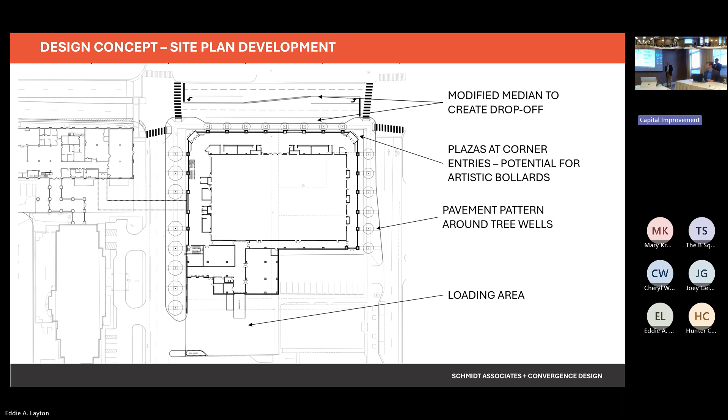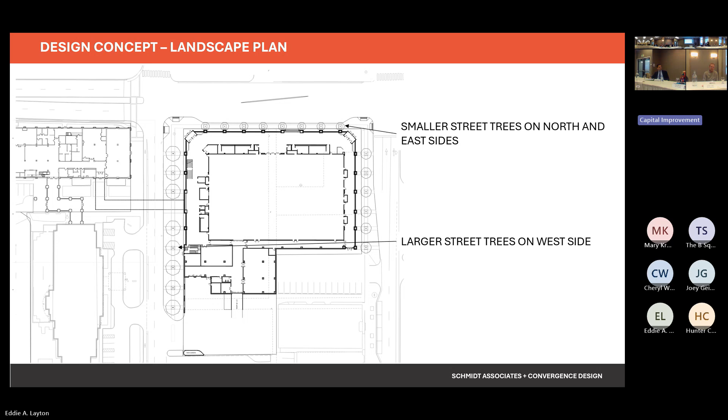Sure. I have another question, and this is just concerning utilities. Seeing that we have some underground storage along the trees along College, we were doing some things there with storm water filtering, right? Yes. And I know right now the utilities run right down the alley in the middle of the building. We have that in the budget, I assume that we've worked through this point for the utility location, right? I just want to make sure that box is checked because that's an expensive part of relocating any utility, and of course the cost is borne by the client. So I want to make sure we've accounted for that in our budget before Eric here, Mr. Spoonmore, wants to make sure it's in the budget as well, Mr. Treasurer.

Yes, we've talked with each of the utilities. Definitely, we have estimates for all the work, and they're working with Jeff Underwood, they're all addressed properly.

So are we at the stage yet where this is being discussed with city planning? Has a planner been assigned to the project? From the beginning, when we were conceptually discussing the project, we met with Jeff Scanlon, and then we've met with him several times. We'd be hitting Monday to file for the planning commission.

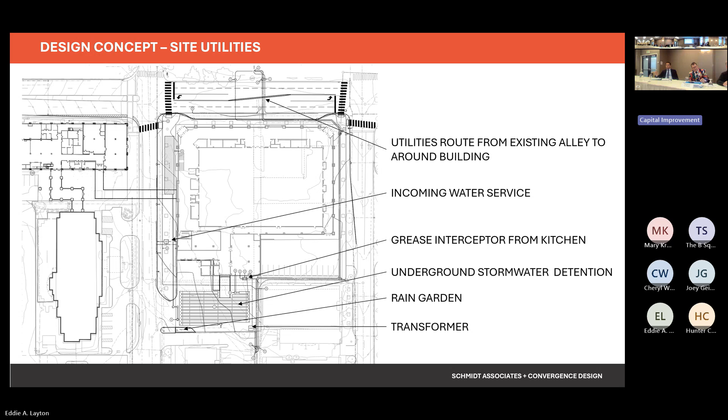Other questions? Good, thank you. Thank you, Bill.

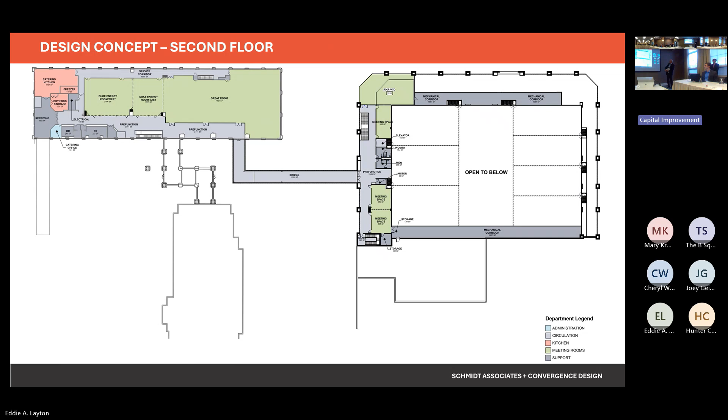We're still fussing with the exact design of the roof terrace and where the plants are and where the people are, but the general idea is that we'll have both people space and plant space up there. And then 3 meeting rooms on this level, as well as an overlook into the big hall, and obviously the bridge connection back to the building we're in now.

So, does anybody have any questions about where the plan development has gone so far, David? Not a question, but while we're still on this slide, let me make a couple of statements that I hope you'll say are correct.

The design that created more movable space came about from discussions that you were all having with convention center staff. Yes, and her group pointed out concerns about that, and that led to some of these adaptations.

Secondly, even though the exhibit hall space has been slightly reduced, it doesn't change the fact that we could still host 4 basketball courts, 8 volleyball courts. What it primarily does is perhaps reduce the number of spaces for vendors from about 170 to 150, if I remember correctly. Yeah, we've been playing with some layouts for functions in the exhibit hall, and we're now at about 154 10-by-10 booths in the space. So it's a little bit reduced from where it was before, but not much.

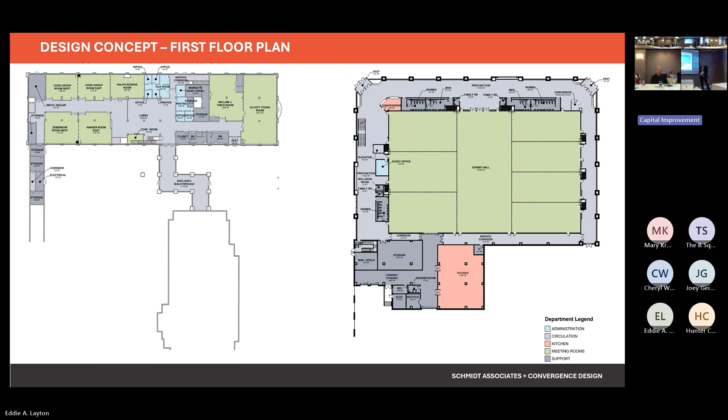Okay, well, that was— thank you for confirming. I know what I'm talking about. You do, sometimes. Okay, any other questions on the plan?

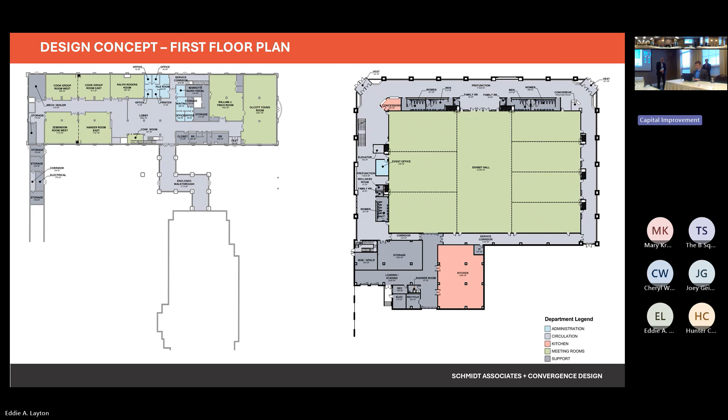Yes, just in terms of square footage, what is the reduction? So we were 29,000 square feet and change before. Now we're 27,000 square feet and change. Thank you.

Any other questions for Dave, on those two slides? Yeah, we've got a few more slides. So these are the current state of the elevations.

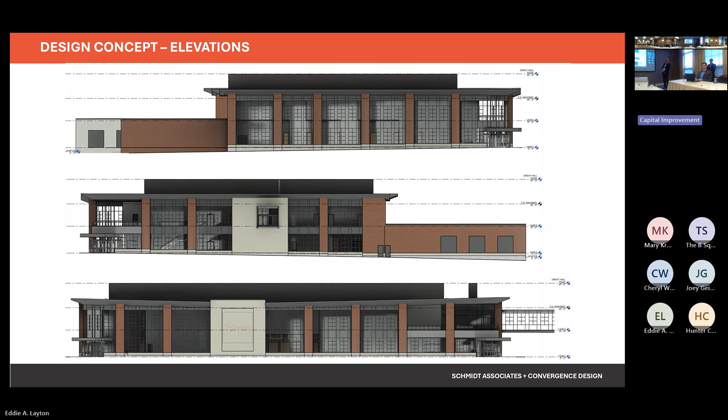These have not changed much from what you've seen before, but we are continuing to develop the elevation concept. One thing that has changed a little bit is the introduction of a stone base along the entire length of the facade on really all 3 sides of the main space. That's a minor detail, but one that is significant to me, and I think will make the Indiana limestone folks happy.

The idea here is that because these brick piers are going to be seen as a 3-dimensional object, we don't want to change finishes on the inside of the glass curtain wall. So we're proposing wrapping the brick all the way around those brick piers, and likewise wrapping the stone all the way around them. One tiny detail is the introduction of a granite base on the outside, because limestone doesn't always perform super well when road salt and stuff gets kicked up against it.

So the first 12 inches of that base would be granite, but everything else would be limestone. We're proposing bringing that limestone base into the space to a certain degree, at least as a base. We're also toying with the idea of a panelized finish on restrooms and things that wrap around the pre-function space, with decorative inserts of rough stone that would alternate with some LED lights. We think there's potential there for a really neat effect with stone and light, adding a lot of animation and activity to that space.

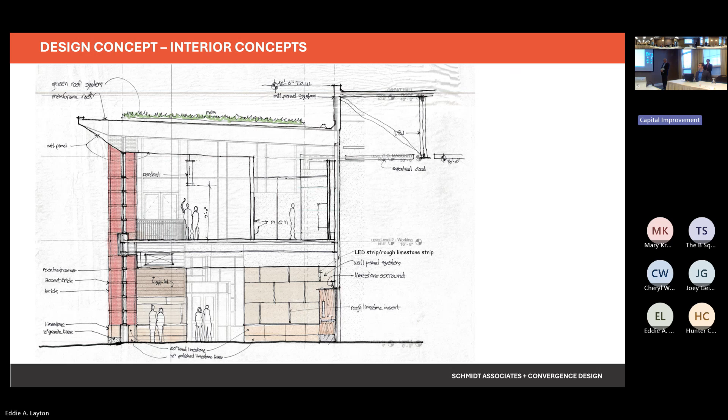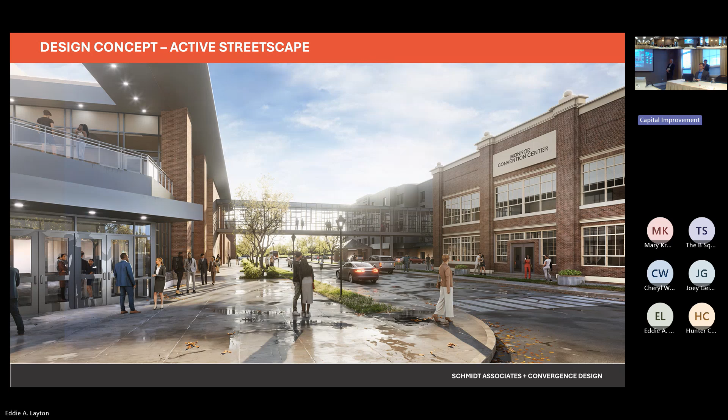You can see the existing Monroe Center here, our bridge in the new building, and this is you looking down 3rd Street toward the east. The next view is looking more down College with the new building, Monroe Center, and the court garden area in the background. And this is a view of one of our pre-function spaces.

I think this is the north side. So this would be the main entrance into the ballroom exhibit hall space on the north side of the building. And this piece here, rendered in stone right now, is one of those locations we've identified as a potential art location. It could be stone, but it's very much TBD, depending on what we want from an art standpoint.

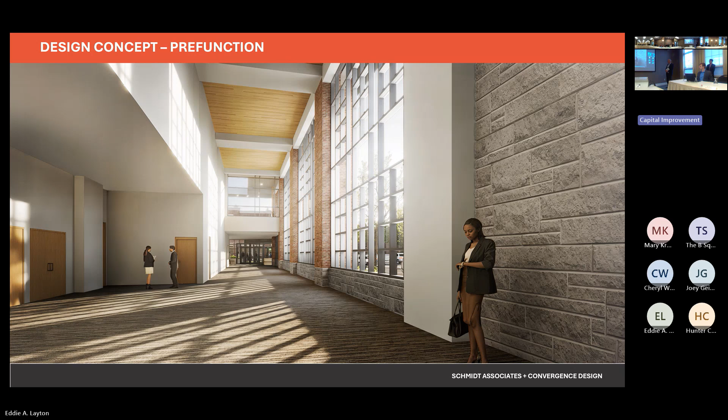There's one more shot. This is the College Avenue pre-function space, and you can see the grand stairway going up to the bridge level, which I think would be a really nice way to interconnect those spaces. You can also see seating and a small planter next to the entry vestibule, which helps to soften the space.

So that's kind of where things sit right at the moment. Any questions about where the design currently is? Do these renderings reflect the expanded pre-function space? Yes, they do. These are the most current volumes that we should be seeing.

It's not a question, just a comment. We are not designing a blue building. We're just showing opportunities that may exist for lighting on the exterior that can make it exciting, and depending on what we're hosting, we simply have those opportunities. It's still a brick and stone building.

It's a materials question, but I continue to notice you're choosing cool gray materials for window mullions and doors, as opposed to this building that has warmer tones. I guess, we live at IU in a limestone world a lot, and the cool grays tend to not work very well with most of the limestone we're getting. We tend to choose warmer grays, so your point is well taken, and I agree with it completely.

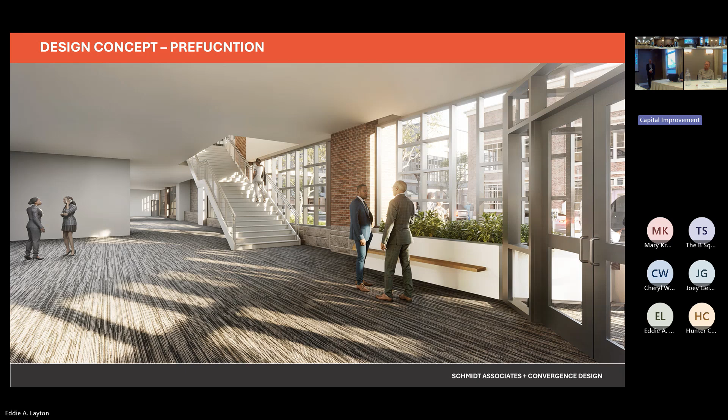Other questions or comments about the status of the design? Eddie? Thank you, David.

We'll have basic selections there, and we can share more on the finishes and things like that.

So, any other design questions? The next item on our agenda is the listing of the variances that we're going to be going after, but I want to pause first to go over design issues.

Any questions about what you've seen so far, or discussion? Okay, Ed.

We talked about this previously, and Bill mentioned this when referring to the site plan. There are several variances that we do have to apply for this project, where we do not, by the letter of the law, meet those codes. This is something we knew going into this project, given our building typology against the typical building typologies that the UDO is written for in the downtown core zoning. We want to briefly share with the group what those variances are, what our strategies are to respond to them, and we always welcome feedback. Some of these are very technical, so I apologize in advance for that.

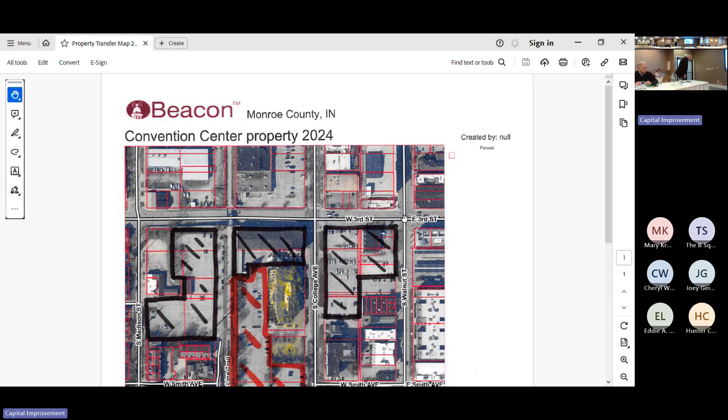So I've been in discussions with Jeff Cockerill, the county attorney. Jeff is here, and I'll feel free to have him weigh in at any time on what I'm saying and what the plan is. But my understanding from Jeff is that once the properties are paid off, or the bond is paid off, they're prepared to transfer the real estate to us. The parts owned by the county that would be transferred are the parts shown in black.

So this is to the west of us, this is the current convention center, and this is to the east of us, all owned by the county. That will all be transferred, Jeff, correct me if I'm wrong, to the county commissioners. Some of it currently is owned by the Convention Center Building Corp, and otherwise. All will be transferred to the county commissioners by quitclaim deed.

And then upon our request, which we have made but I think we will make official today, we will ask that those properties then be quitclaim deeded to the CIB, all to happen within the next 30 or 45 days, something like that. The debt is scheduled to be paid off, thanks to the Convention Visitors Commission, in January. So my hope would be that we'd have all the transaction done in January.

At worst, early February. I'm having the auditor's office put together the legal descriptions for each of those parcels. They look like they're 3 blocks, but there's probably 20 parcels. Right, there are. And so when we sent the letter to you after this group requested, hey, what is the county's intention?

We said there were two real issues we had to deal with for those northern properties, because everybody understood those were absolutely necessary for this. One was that we get through the 2024 general election, which we're through. The other was that we resolved the debt, which thanks to the Convention Visitors Commission and the county council, will occur by basically the end of the year. So in January, we would be able to start and do the transaction. It's a transfer of the properties, and you guys see what we need.

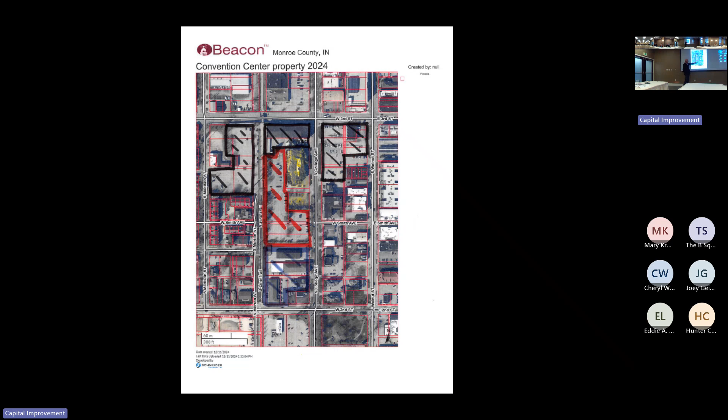The question is, sometime if we wanted to, Jeff and I have talked and we can make that request, and the county commissioners can decide how they want to handle that. It's my understanding, correct me if I'm wrong Jeff, that these are currently owned by the Convention Center, but they're going to be transferred to the commissioners as well. Correct, once the debt's resolved. The area in red here is what's owned by the city.

And we have had discussions with the city about those transfers and those properties in red. The city said that they were willing to work with us on the transfer of those parcels. We have not specifically talked to them yet, so that'll be the next step for us. This in yellow here is what's owned by the Courtyard Group, so that's what that property is there.

So we will be working on the transfer with the county. We'll be further following up with the city about the transfer of that. And then after we own that real estate, there will be the issue with the bonding process with the city, where some of that real estate will need to be addressed. That'll be something where we'll be in discussions with bond counsel and finance people about what part needs to be transferred to secure the bond, or as part of the bond process for the building of the convention center.

So at some point, we're going to come back and some of that will need to go to the city as part of the bonding and pursuant to the interlocal and other agreements we have. After the retirement of that bond, it comes back to the CIB, but that's down the road where that will occur. And when you say city, that refers to the new city building corporation that was established. Correct.

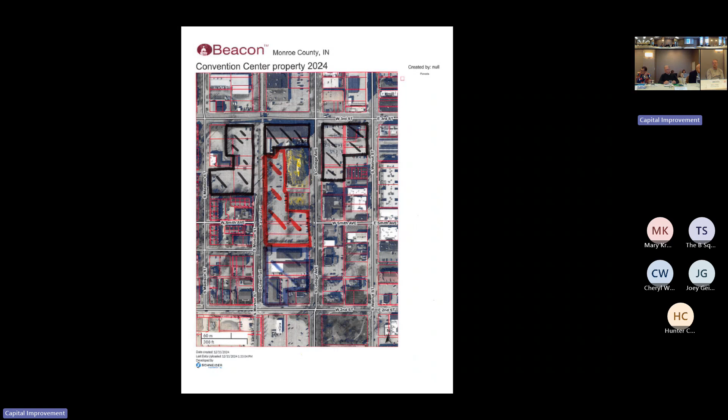All of this becomes important because once the bond is retired on this building, that sets up the dominoes that can fall moving towards the bonding process. I don't know if there's anything new to report on a schedule for the bonding other than what we heard last month, which is that it's anticipated that in January or early February, the city council would be dealing with, or we would be presenting to the city council a request on the bonding. So I don't know if there's other information that we have.

I don't mean to put our city controller on the spot, but do you have any update on the scheduling? Jessica McClellan, city controller: I just took a look at the schedule today before this meeting, and we've adjusted everything to that. We're planning to meet with city council twice, once in January and once in February. So two city council meetings, and we can get on the schedule. We're gonna work on it right away to get those in. We'll work with Jim, we'll work with you to make sure. Thank you very much, Jessica.

All right, item number 10, process for building naming, and my name's beside that. The interlocal agreement charges the CIB with the naming of the new building. Selling the naming rights to the new building requires the prior approval of the mayor and the county commissioners. Selling the naming rights to the building currently does not have support that we would move forward in that direction, but we still need to move forward in the direction of the naming of the new building.